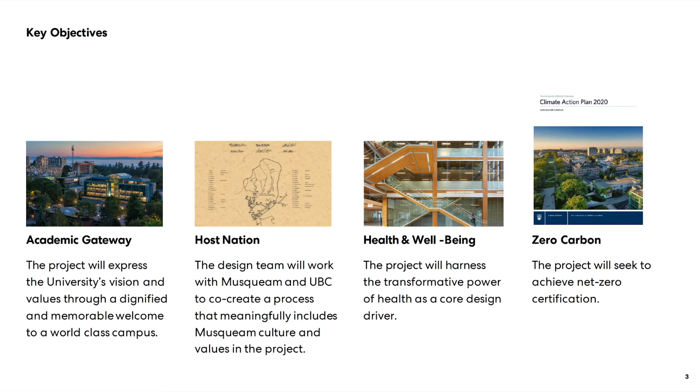A brief overview on the project site and how the immediate context has influenced the project. The Gateway building sits at one of the principal gateways to the campus and really at the threshold between the UBC campus and the university endowment lands.

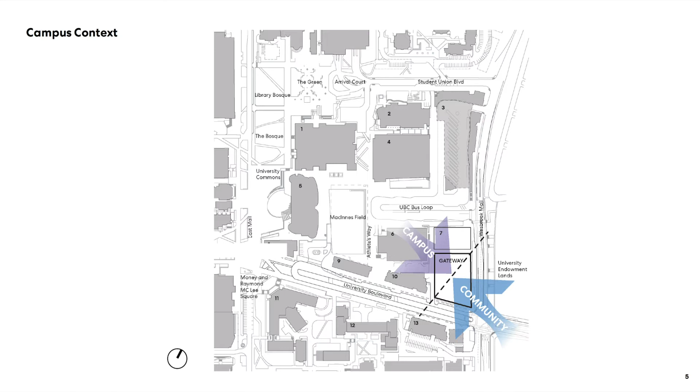So the design seeks to respond to both the significance of this site as a gateway site to the campus, but also fit into the character and scale of the existing university fabric.

The project site itself is bound by University Boulevard on the south, Wesbrook Mall on the east, and by multi-purpose laneways on both the west and north sides of the building.

The central building, immediately west of the site along University Boulevard, includes parkade access and waste servicing off of that existing laneway. It's important to note also there's a BC Hydro right-of-way that runs the full length of the east edge of the site.

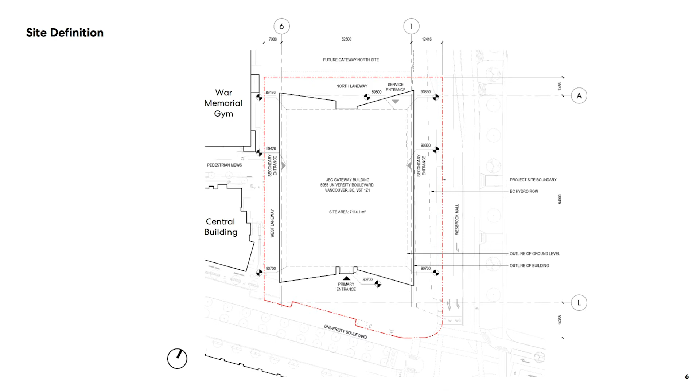The laneways to the west and the north will continue to serve as service access for the Gateway building and adjacent buildings as a one-way loop entering along University Boulevard and exiting onto Wesbrook Mall.

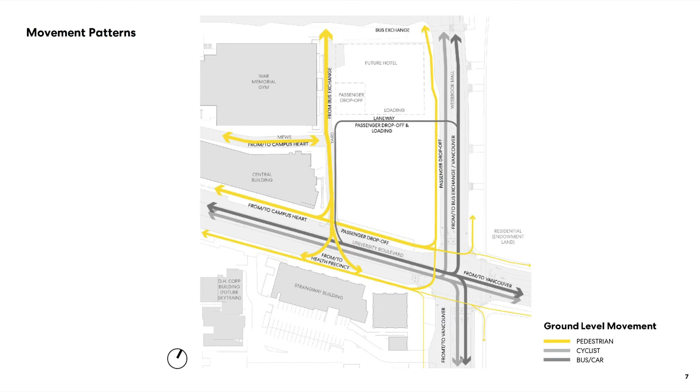It's also important to note that the laneway running north-south is going to continue to serve as an important pedestrian connection to the bus exchange that's north of the Gateway site, and connecting to the pedestrian mews that runs west, connecting to the heart of campus.

We'll run through next a high-level overview of the design rationale for the project and how that's evolved or come to be on this site, beginning with a series of diagrams that describe that evolution.

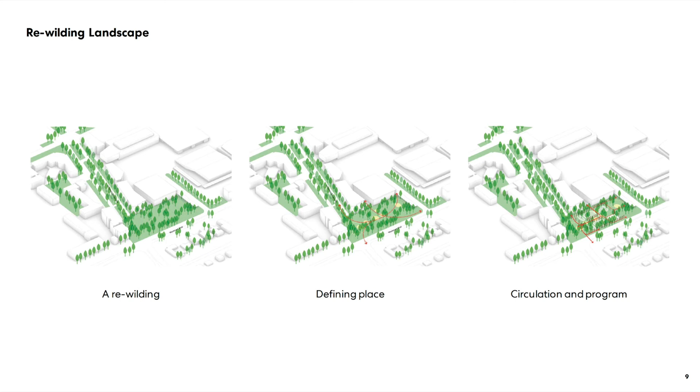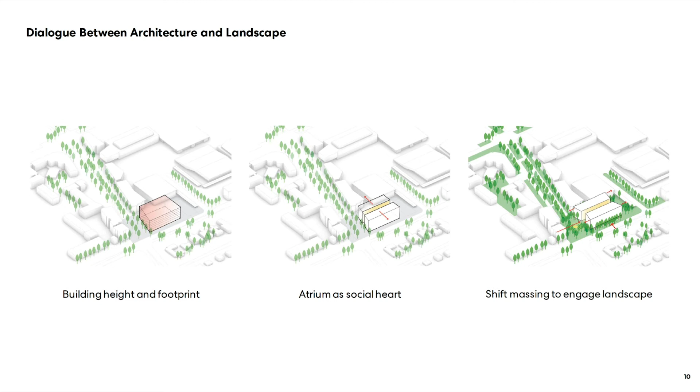The ground floor was then recessed to provide more generosity at the ground plane, and the entire massing has been shifted north to create breathing room along University Boulevard and engage the landscape as part of that gateway experience.

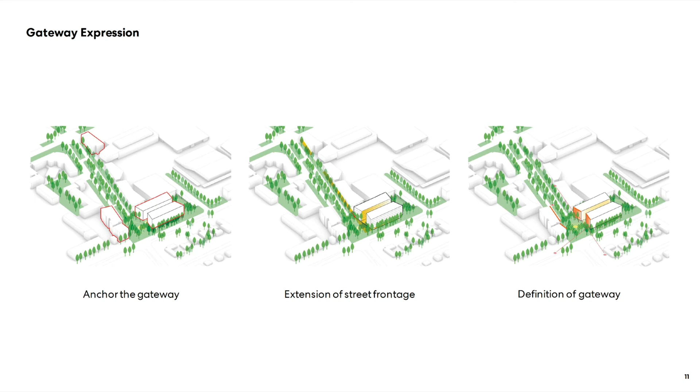The landscape and site design illustrate a conceptual approach of rewilding the Gateway site, which has been informed directly by conversations that we've had with Musqueam.

That engagement process with Musqueam is ongoing, and the landscape will continue to be developed further through this dialogue, in conjunction with a parallel study looking at the reimagining of the University Boulevard landscape. Once that landscape has been more fully developed, this will be resubmitted as an addendum to the development permit and AODP applications.

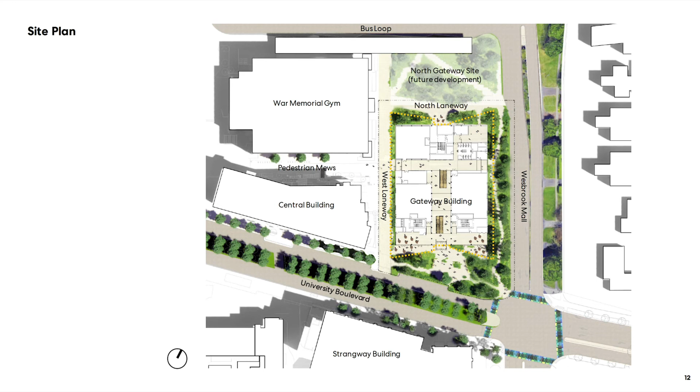The building itself is organized into two equal bars that house the academic program, flanking a central daylit atrium that visually connects all of the floors together.

A modular exposed mass timber structure serves as an organizing element that is designed to allow for flexibility of the building over time.

That central atrium is really thought of as the social heart of the building. It's activated by interconnecting stairs and social spaces that are linked back to views and light.

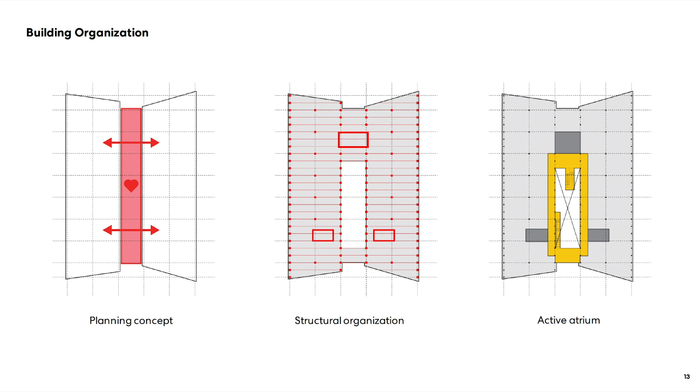At the ground level, multiple entrances extend the public realm of the site into and through the building.

Along University Boulevard, the full extent of the south facade is programmed as an open cafe and study space that continues that activity within the landscape and the existing frontages, opening the building directly onto that identified gateway plaza.

Building servicing, including waste and loading, are concentrated along the north edge of the building and are accessed off of that north laneway.

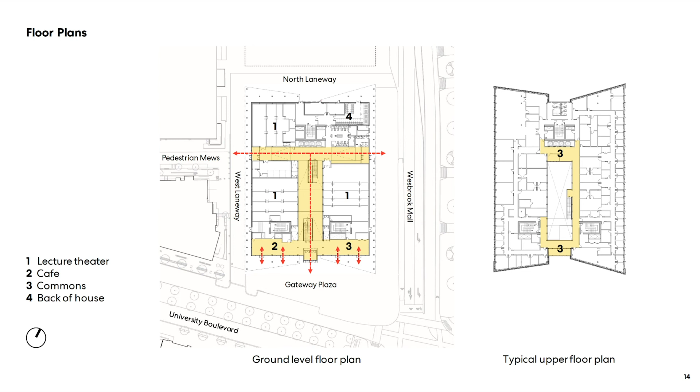The upper floors are comprised of densely organized teaching, research, and workspace program that serve the academic and pedagogical needs and vision of the schools that are moving into the Gateway building.

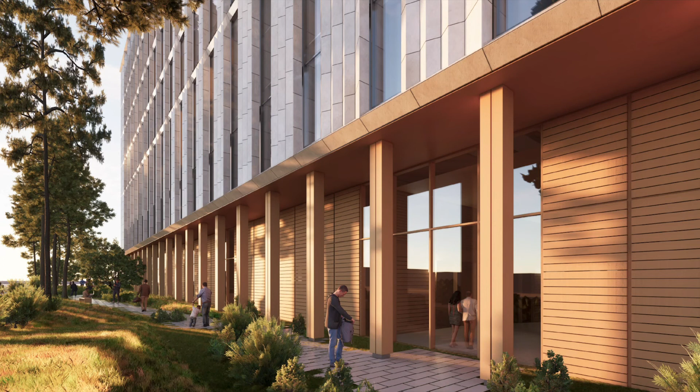That expression of the mass timber structure is really deeply connected to the goals of the project, supporting health and wellness through biophilic properties, reflecting the traditional Musqueam building materials, bringing warmth and creating a welcoming entry to the campus, and celebrating the use of low embodied carbon materials in this net zero project.

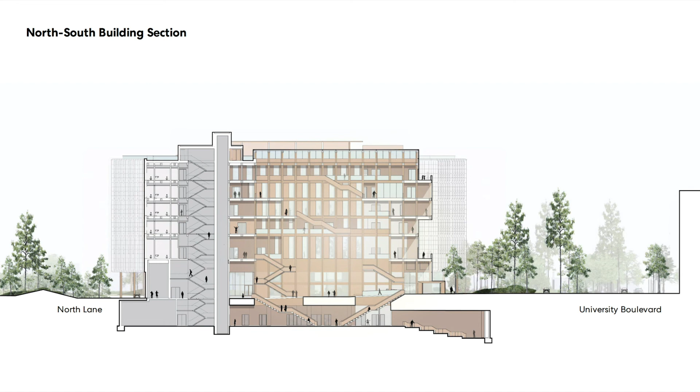A north-south section through the building highlights how that timber structure and cladding are celebrated within the building's public and interior spaces.

These are some perspective views of that atrium space that describe the light-filled space extending all the way to the south facade, creating a welcoming gesture along University Boulevard and displaying the energy and activity within the building.

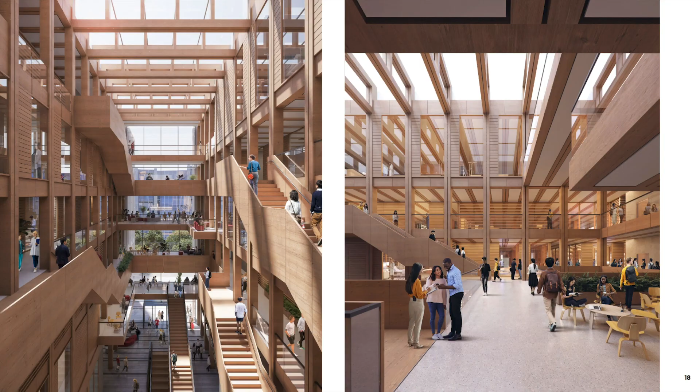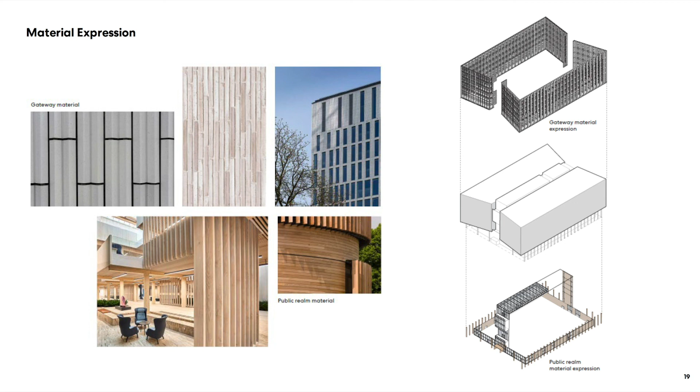The overall material palette for the Gateway building seeks to present a distinct Gateway expression using materials that build on the vocabulary and existing campus character, and that evoke a strong sense of place reflective of our natural context through the use of natural and local materials.

The exterior ground floor is clad in local natural wood materials, bringing an inviting and textural quality to the building, particularly at the human scale, using horizontally applied boards that are representative of the Musqueam tradition of building.

In contrast, the two program bars from levels 2 through 6 are clad in an off-white three-dimensional cladding that connects back to the campus design guidelines. The design intent is to use a natural material with visual variation that provides texture and relief to those facades while self-shading the full height glazing at each floor.

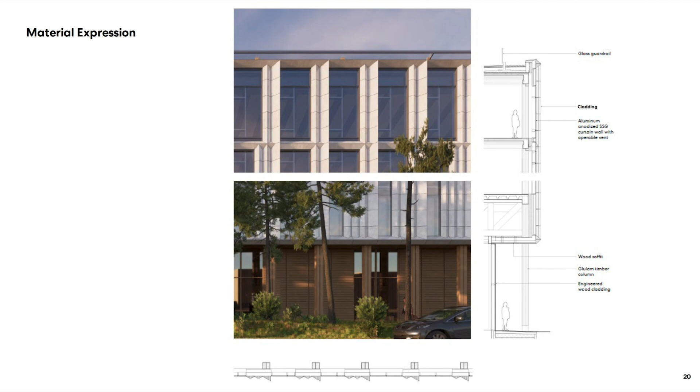With that, we'll conclude the overview presentation and certainly welcome any comments or questions.